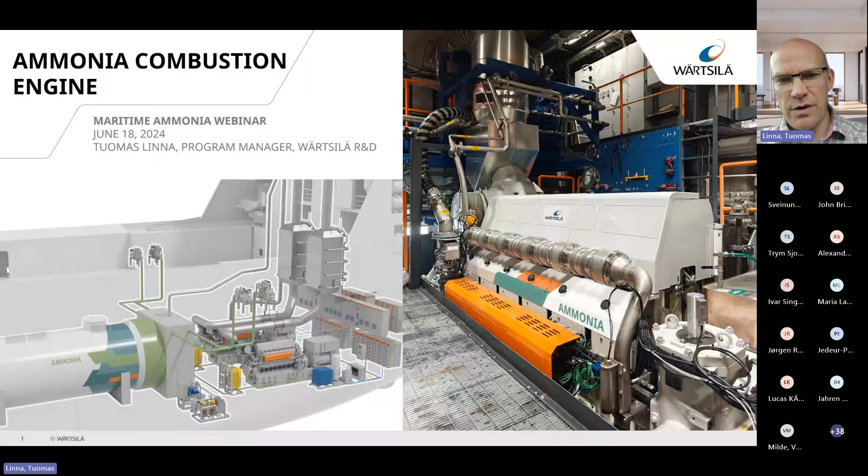On the right, you can see the picture of the ammonia test engine, which is similar to the first ones that will be delivered, and on the left side you can see the system that comes with it. So I just put this here.

So the safety is of course driving the development, but also the outcome of it. It needs to be safe to use, and that we secure in the internal collaboration and external collaboration. I'll get back to that one. But this is very, very important to do well, as we all know.

So this holistic approach that we are using - we have the whole ammonia system there, from the bunkering to the exhaust treatment. And then together with our partners, with customers and the classification societies, we then want to explore all possible problems that there may be, so that we can tackle those in the design. And if not, if there is still something, then during the operation, we want to ensure that nothing happens.

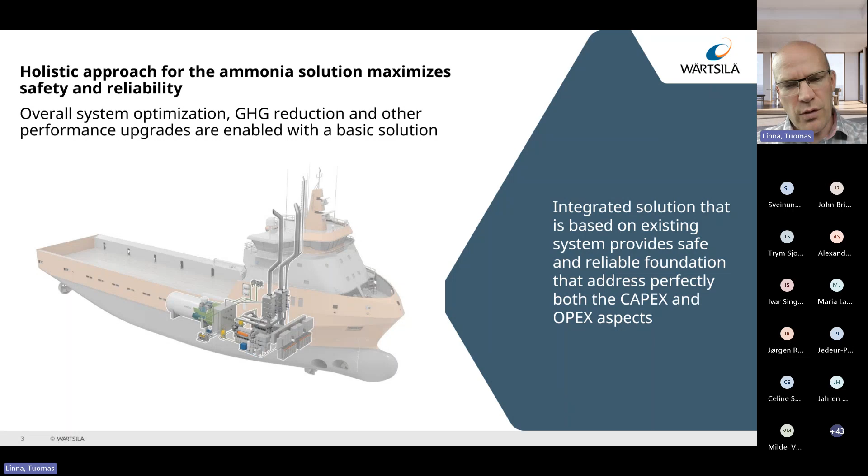So then we are able to - it's still compared to diesel solution or LNG, it's more expensive, but the capex is relatively okay, and the opex of course. So that is the approach that we have, addressing those both.

So here are some good things about why ammonia burns well and why the internal combustion engine is very good. We know that this is well proven technology, which can be translated relatively easily to burn ammonia and turn that to shaft power. So we have the existing safety concept, and with the 25 we are using the LNG type of combustion and the safety concept as well, which is a very, very good foundation to cope with the rules and to co-create with the rule creators. So this is a good starting point.

Then the second point - the internal combustion engine has tens of, probably thousands of millions of running hours altogether, but we know the basic technology relatively well, so the technology itself is pretty robust. The upgradability is something that is very, very good.

So we know that we can convert the existing fleet. Of course, then the business case dictates which type of engines you want to convert, because you need to do the R&D work there. But that is a good advantage there.

The fourth point, the multi-fuel engine - so you have a perfect backup, and this is of course in marine something that we all appreciate, that there is an instant backup right away. The same asset can do that with the backup fuel. The power density is good, so that fits for all kinds of vessels.

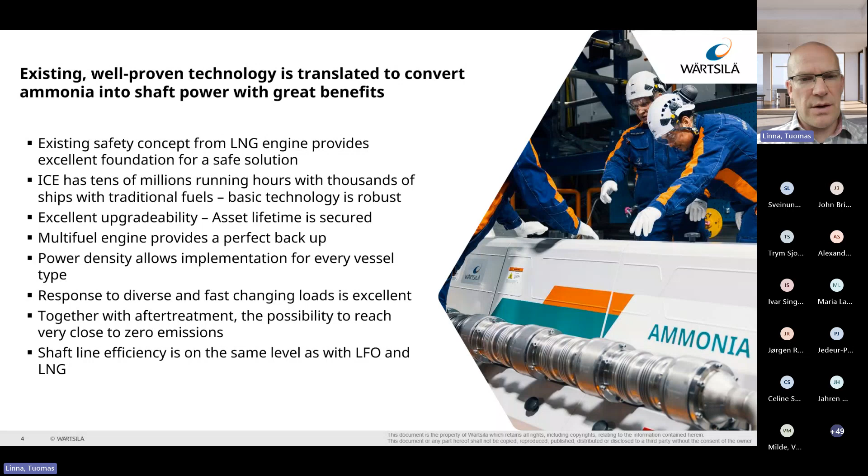I don't want to spend much time with this slide, but I just want to show that we are focusing with different platforms, running different types of engine concepts on the small scale and the bigger scale, to get a big enough picture. Because usually if you test only with one, you get only the features of that one. But when you have repetition and different kinds of things, like we have at Stord and at Vaasa in small and big scale, then you really learn. And I guarantee this is the right approach before you go to the field.

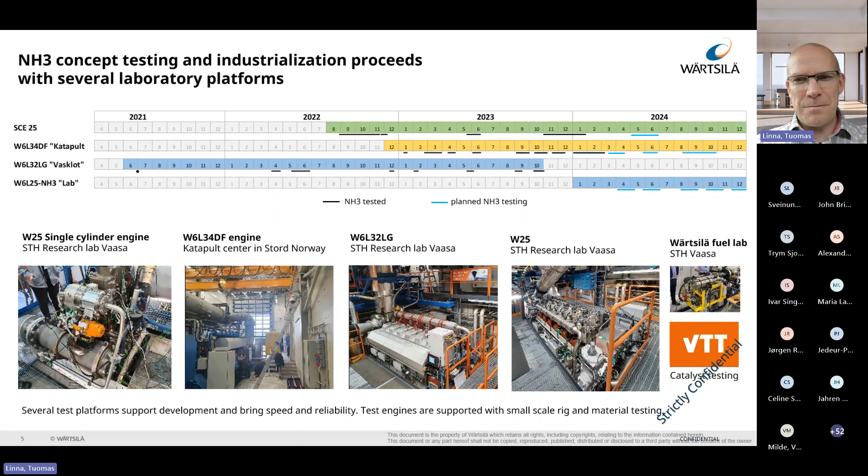About the technology itself, there are basically two ways we can divide this. We have either liquid ammonia or the gaseous format, so you can play with that. Ammonia is good in that respect, that you can decide which format you bring to the cylinder, and both can be divided into different smaller concepts. With those different test platforms, we have tested many different kinds of things.

And from there we have made the decision. We have not decided which one we don't ever use, but we have decided which one we go first, and that is the gaseous way, using the type that we use with the LNG engine. So always having the small micropilot there, which ignites and which can take over immediately as backup if needed. So if there is some problem in the ammonia feed or in some safety system, then the operation continues - it just turns that into diesel.

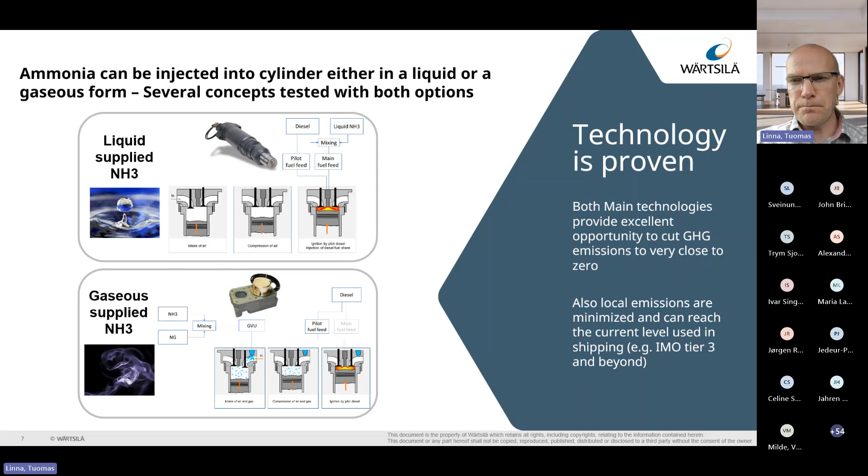Thinking about upgradability, we have done our mapping. We have a modular structure in our engines, and the newer the platform, the better that is. But we have tracked what are those things that we need to change when we do the engine conversion. On the left side, at the top, you have from diesel to LNG, and then from LNG to ammonia, after that one.

You can also do that directly from diesel to ammonia, that's no problem. That's actually what we did in the lab engine. Our 6-cylinder lab engine, which started the diesel validation of the 25 platform - when it had completed its work, we made an exercise. We took our service resources who did the conversion from diesel to ammonia in the lab.

But of course, what we need to say about the conversion on vessels - if you have an existing asset, then the engine plays a relatively small role. Of course, ammonia tanks take up big room, as we know, and safety needs to be taken into consideration at the vessel level. So I would say the engine itself, in the engine conversion, is a small thing. We are all the time talking about and thinking about the big picture. So if you have such a case, we are happy to be part of that design.

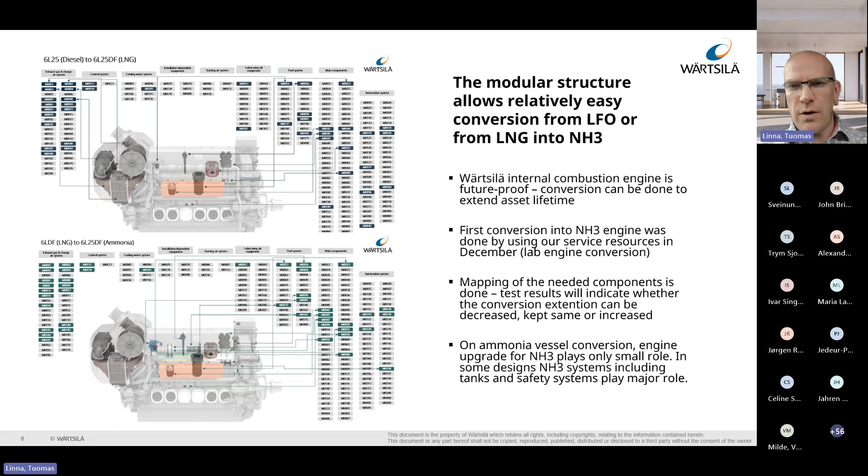Concerning performance, we brought the Wärtsilä 25 ammonia solution into the market last year in November, with the 70% greenhouse gas reduction promise. That doesn't mean that's where we end, but that's where we started this journey from. And when I talk about the greenhouse gas reductions, it's the greenhouse gas equivalency from tank to wake. So there's a little bit of laughing gas which is part of this equation. In practice, we are already doing better with that industrialized version, but this is what we can guarantee with that product.

With the lab, we already did the next steps a couple of years ago, and we are proceeding with those. So on one side, the big picture is to optimize the engine in a new way, and there are different parameters to optimize. Thinking about the greenhouse gas potential that N2O has, when you minimize that, the efficiency becomes the secondary thing. So it's really important to bring that close to zero. But there's the N2O, then of course the ammonia slip, NOx, and then the ammonia share and the efficiency that needs to be optimized.

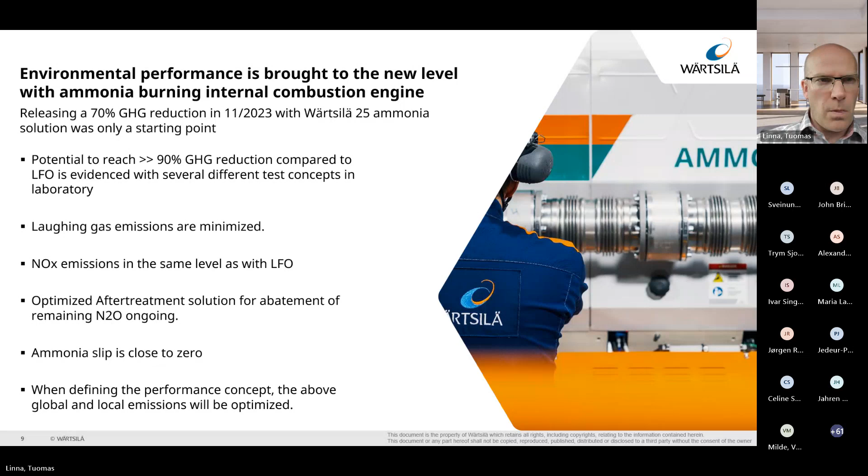And then get into this collaboration part that I also started this with, to ensure that we do it together safely. So we have several customer cases ongoing, which we are soon to close or contract. There we are talking about the 25 engine and this whole solution, from the bunkering to the exhaust gas mitigation.

Many of you may have the existing engines, 32s, 34s, or the large bore engines, 46, etc. Conversions are also possible for those. The industrialization decision needs to be done though. But what we are doing now with the 25, we can use the same things, so technically that is possible for the other engines as well. It is just more about what is the business there, and how big the market is. Then we make those decisions. But now with the 25 actions, we are proceeding and paving the path to the other engines as well.

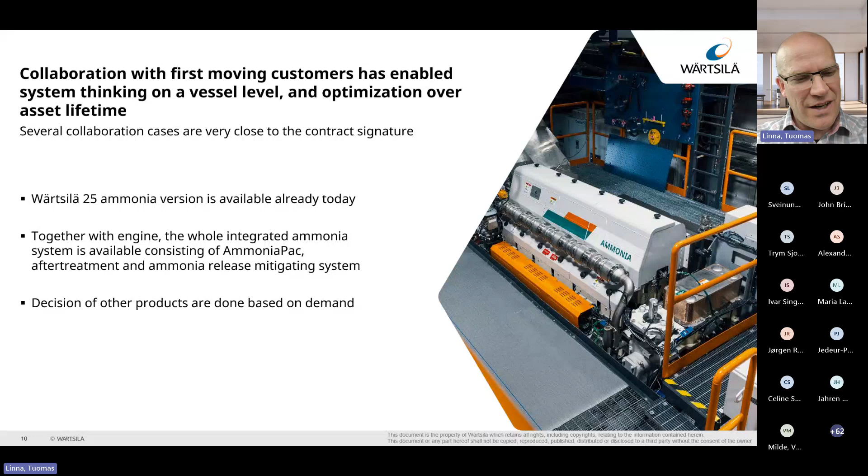I don't know how many minutes I used, but I tried to be very quick just to cover these main topics that I thought were important, and I was thinking that we take more time for the collaboration part if we have time. So yeah, the time is okay. If you do have some more, you can add it, but it is okay to stop as well if you're finished.

I think this is then a good time to start the discussion. So, any questions to me? Yeah, I'm happy to. Thank you for the presentation.

We received questions in the Q&A related to ammonia slip. The question is: is ammonia slip kept close to zero even at partial or low loads, such as in port operation or hotel loads? Yes, it is. It's not zero, but it's very close to zero, something which is acceptable to the classes. We are talking about only some tens of ppms. How we tune the engine is with all the loads where you are able to use the ammonia, which is now actually the whole range, from 25% to 100% load. There you are able to use the ammonia, and the whole system works with that.

Next question: you mentioned that gaseous ammonia injection may be better. This is different than what is used in two-stroke engines where it is always liquid injection, similar to LPG. What are the advantages of gaseous injection in four-stroke? Also, what is your current value of pilot fuel percentage? Very good questions. I don't mean to say that it's better, this low pressure approach. We selected that one because we think that from the safety point of view, it is the quickest and best way to enter the market. You can also do high pressure injection and we have good results with it. But thinking about the high pressure ammonia in the engine room and the leakage risk, we concluded that having the low pressure, less than 10 bar, in the gaseous format, is better from the safety point of view to start this journey. But both work well.

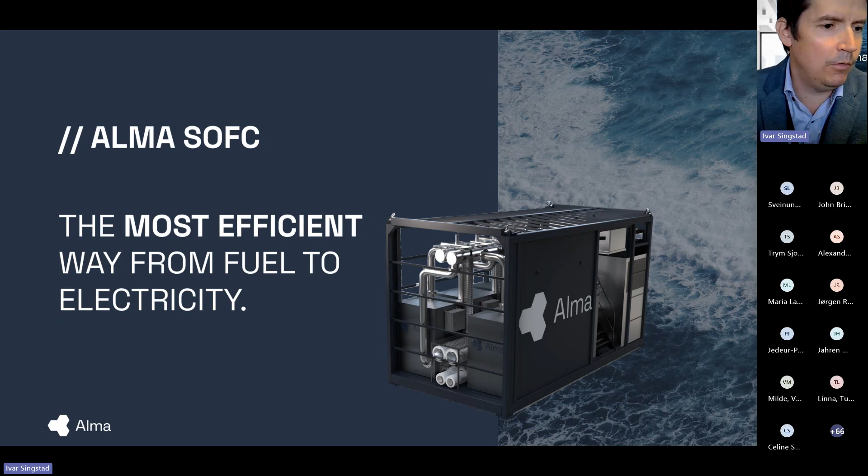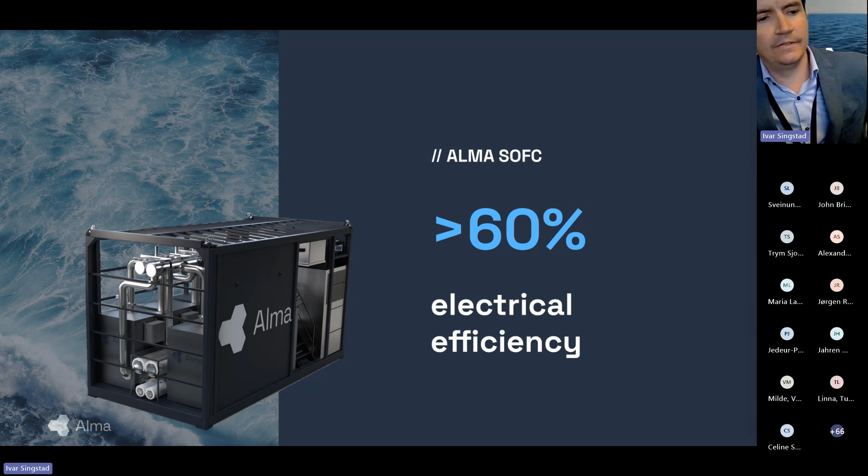So how efficient is it? Our ambition is to deliver 70% efficiency - that would include the carbon capture. 60% will, however, in many cases cut emissions by 50% and reduce fuel costs radically compared to alternatives. It also reduces the need for storage tanks, or adds range to your operations on board the ship.

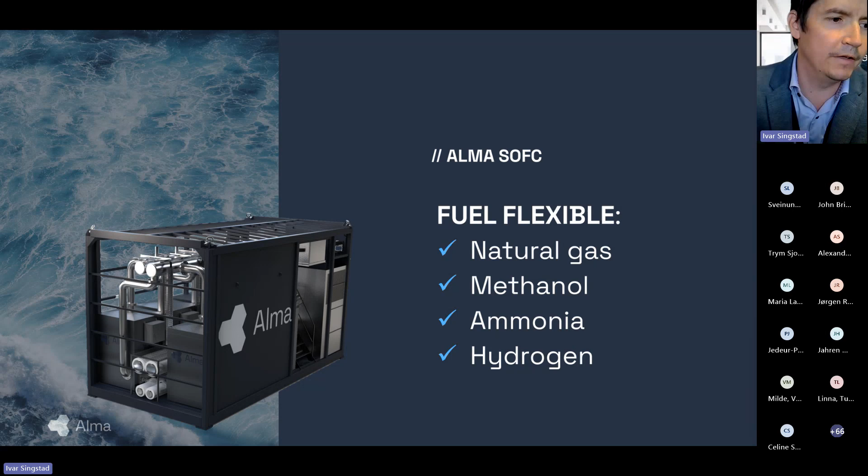So another benefit of solid oxide fuel cells is fuel flexibility. We have tested the SOFCs on the most relevant existing and future fuels with good results. So we see SOFCs as a bridge between LNG, the cleanest solution available today and an available fuel, and the new fuels like ammonia, the topic of today, but also methanol and hydrogen. In the rest of the presentation, I will cover most of what we are doing on ammonia - that has been most of the work till today.

So in addition to the efficiency and high fuel flexibility, our solution offers several other advantages. Like other fuel cells, it has no moving parts, so the SOFC is silent, low vibration, and has lower maintenance needs. It's a modular design, which means the installation can be distributed to optimize the payload.

So a ship like, for instance, a car carrier could arrange this in one deck and thereby have more space for more goods and more cars on board. SOFC is also ideal for carbon capture, since you never mix fuel and air.

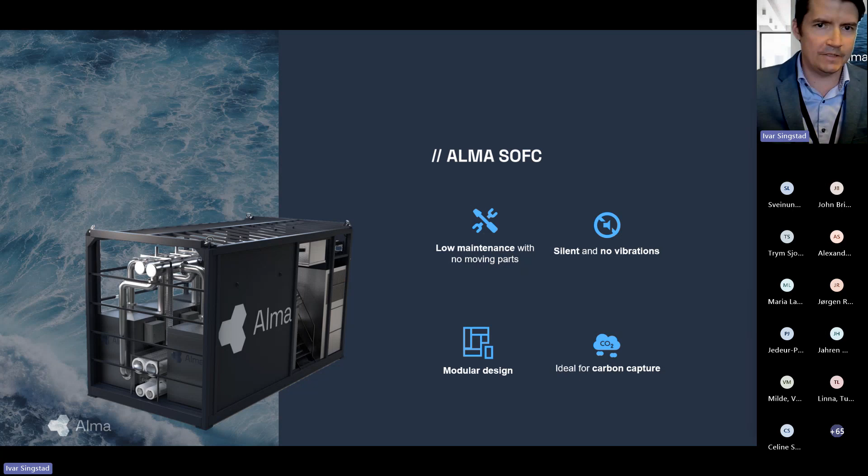You have a lower exhaust volume and then high CO2 concentration. So, of course, with all these benefits, it basically sounds too good to be true. And of course, there are some drawbacks with this technology. It's still immature, and with that comes cost that is today a bit higher than engines. But that being said, in the lifetime of a power system, the fuel is by far the biggest cost.

And especially with future fuels like ammonia or e-methanol, the fuel cost will be quite high for the coming years. So efficiency kicks in as really important. You can see in the illustration here that even though the SOFC is twice as expensive as an engine, it's profitable within 2 years for the ship owner.

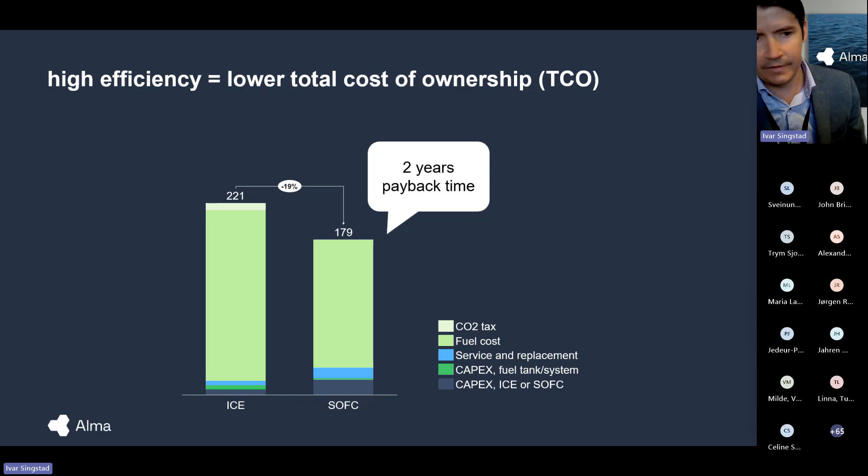So that was a bit about the benefits, about the technology. And now I'm going to tell you how we are planning to scale this from the lab where we are today, and on board the ships.

So the first thing we did was last year, we tested one stack module in our labs here in Bergen. That is a 6 kilowatt stack module. Importantly, we ran that on pure ammonia. The important part there is that we could show efficiency from 61 to 69%, depending on the range. So a really important test to show that it's possible to run ammonia in SOFCs.

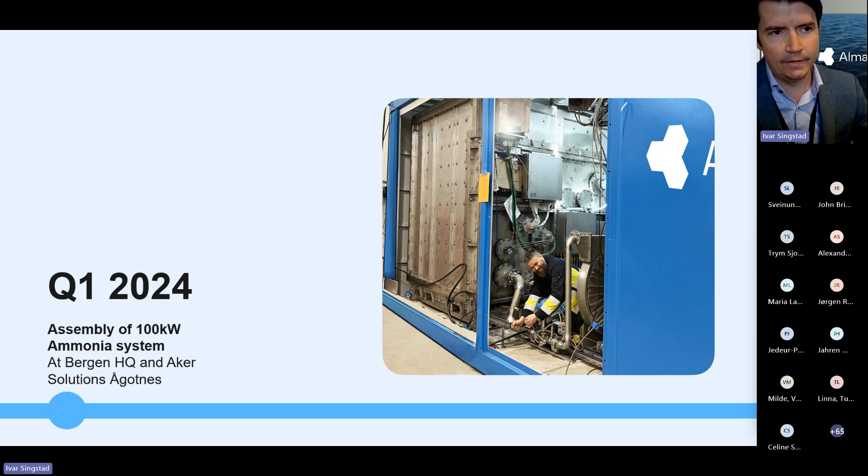Last year we have been building a 100 kilowatt system, what you see in the picture here, that has been built in our office here in Bergen and at Aker Solutions Ågotnes. And here you can see what's inside the hot box, where you have one module.

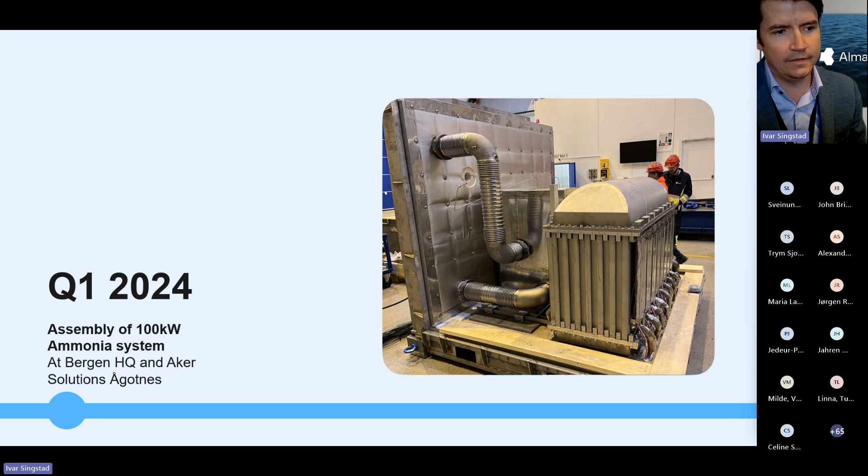This system is still quite a large test setup, but you can see that the stack module itself is not that large. All of this is being tested at the energy house at Stord. So we had a test readiness review of the 100 kilowatt ammonia module on Stord yesterday, and we hope to be starting it this week.

Our test setup is in this garage, and then Wärtsilä has their engine in this one, and over here you have Amogy's testing. So all the speakers today are doing testing in this building.

Next year we will launch our products, and with that the specification—size, weight, output, input—all the things that ship owners are quite curious about, before we have the first project where we go on board the ship.

This is on a cruise ship, so as you probably understand, ammonia is not the first application—cruise ships are not the first application for ammonia. So we will do this demonstration on board an MSC cruise ship that will be on LNG, a 500 kilowatt installation that will be in the machine room, as part of the whole system there.

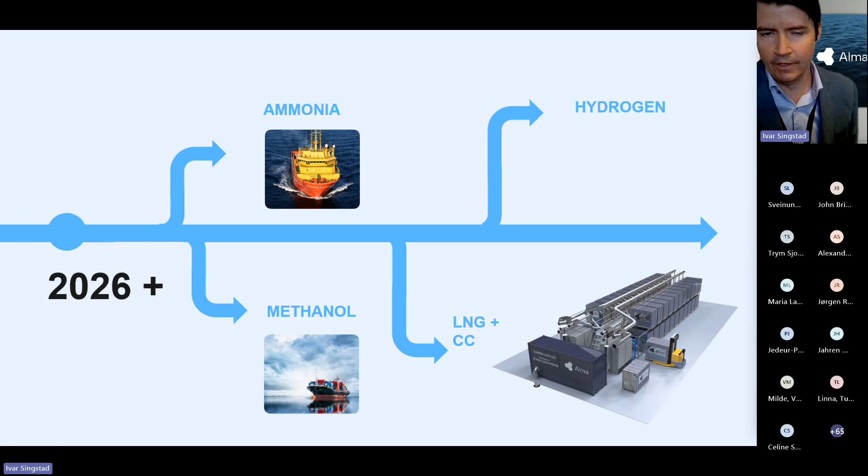And from 2026 and out, we plan to deliver on several things, both on ammonia, methanol, but also LNG with carbon capture systems.

Our plan for industrialization is that today we build things at Aker Solutions. We plan on putting up a pilot assembly line as soon as possible, before we aim at full scale production in '27 at 400 megawatts yearly capacity, and after that, global expansion.

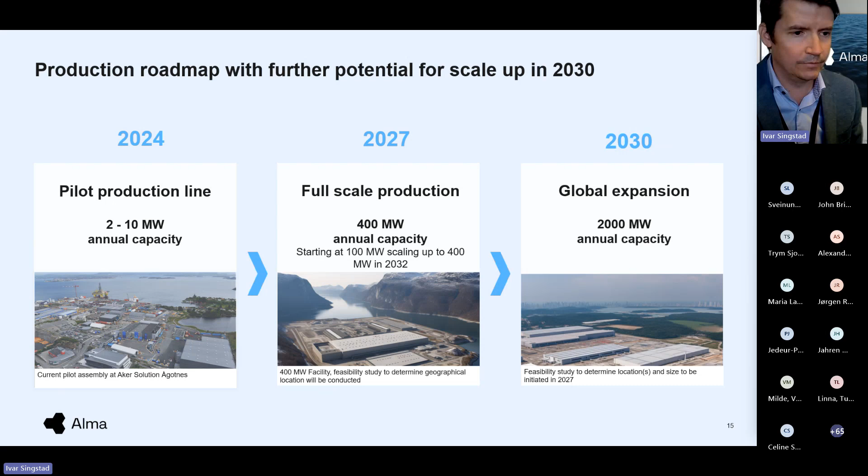So the topic today is ammonia, so I would like to highlight the benefits of SOFC for ammonia applications. Of course, the efficiency we have already talked about. What's unique with SOFC is that when you run it at 800 degrees, you can crack the ammonia internally in the stacks. So there's no need for pre-reforming or anything. This is very interesting, and what we are aiming to demonstrate now at Stord in the coming weeks.

There's no need for pilot fuels either—it's pure ammonia going into the system. And there's negligible NOx.

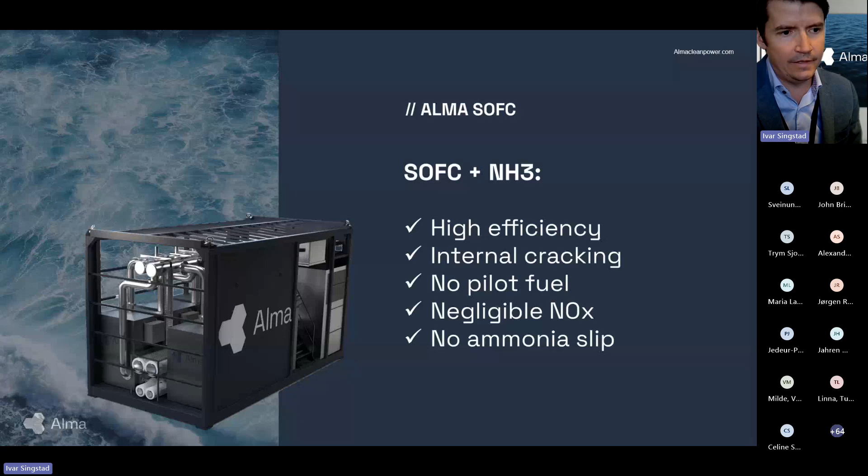The numbers here we don't have before testing it. When we test in the lab, it's not possible to measure anything because the amounts are so small. But we have reason to believe it will be low, because the rest of the fuel that is not converted in a fuel cell is burnt in the afterburner below the formation temperature of NOx. So of course it's lower risk of ammonia slip with these fuel cells than with other technologies.

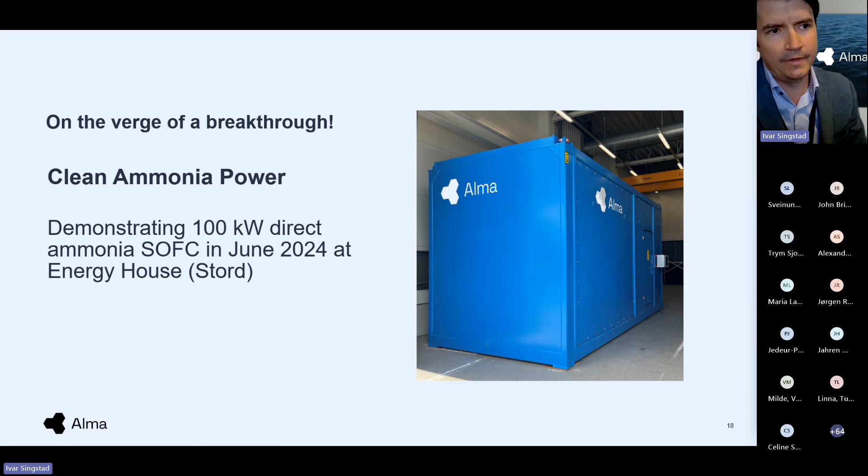As mentioned, we hope that we are on the verge of a breakthrough with this system that you see here. You see the cap module at Stord, ready to push the button in the next few days.

Here you can see the setup, the container. You can also see the partners in this project: Wärtsilä, Equinor, Yara, Eidesvik, and supported by Innovation Norway, Siva, and Sustainable Energy. You see the hot box module to the left with the stack modules inside, and you have the BOP system to the right.

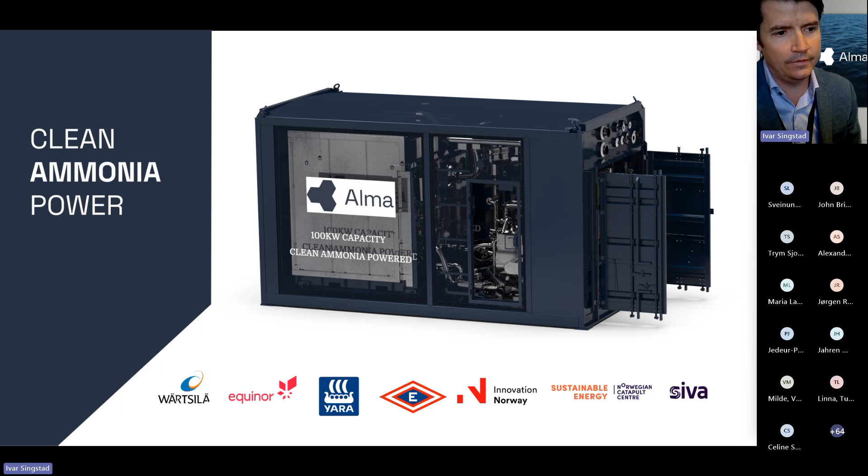So what we're going to do on ammonia after we have done these tests: the next ammonia project is called ShipFC, where we are going to retrofit 2 megawatts of SOFCs on board Viking Energy, a vessel owned and operated by Eidesvik for Equinor. That is going to be done in '26. The partners in this project are Equinor, Eidesvik, Wärtsilä Power Solutions, and Wärtsilä Gas Solutions.

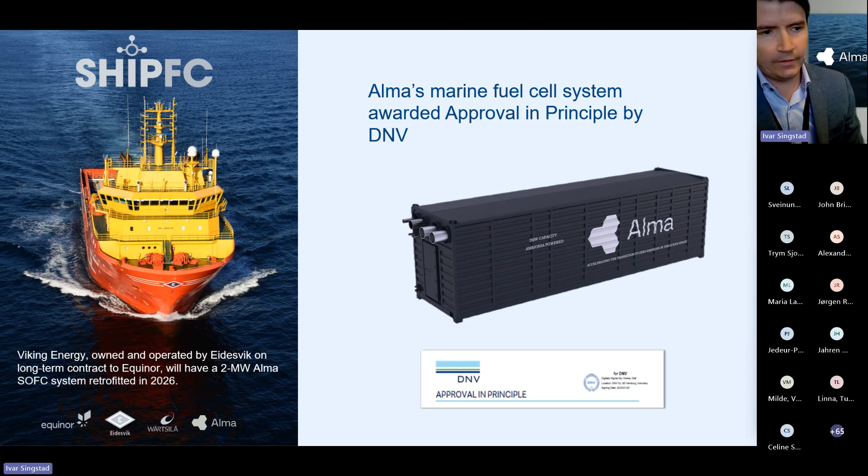Yeah. So that was what I had presented. I probably talked too fast as usual, but if you have any questions, I'm here. Thank you, no problem.

We have a lot of questions in the chat, so I think we're just gonna jump into it. Can you say more about maintenance and replacement of SOFCs versus combustion engines? And is the maintenance cost for SOFCs significantly lower due to the lack of moving parts?

Take the last part first — that is what we guess. Of course there's a lot of things you have to replace in engines; I'm not an expert on this, but we have several people from engine manufacturers on our team who have been working with Bergen engines and others. With SOFCs, what you have to replace are the stacks, and the stacks degrade over time. Right now our philosophy is that we change everything within 5 years. So when you have the maintenance interval where you dock the ship, we replace everything. But the systems are built as modules, so you can use a simple forklift and just replace one module if needed. We designed this to last 5 years, and then we replace it at docking.

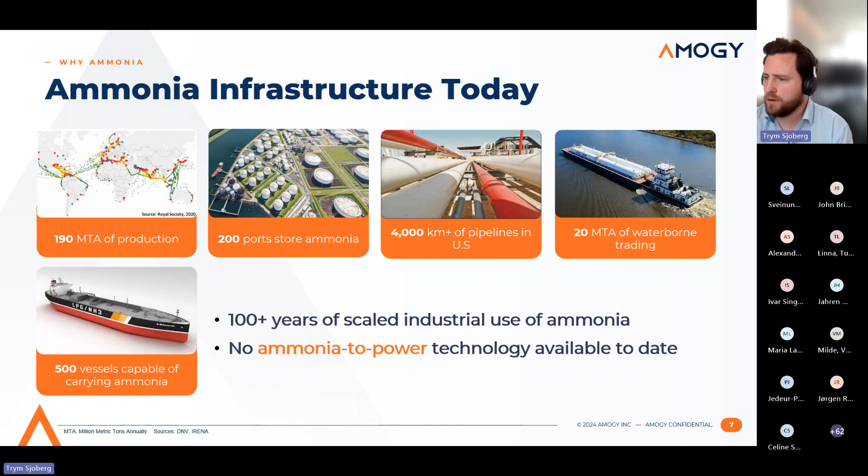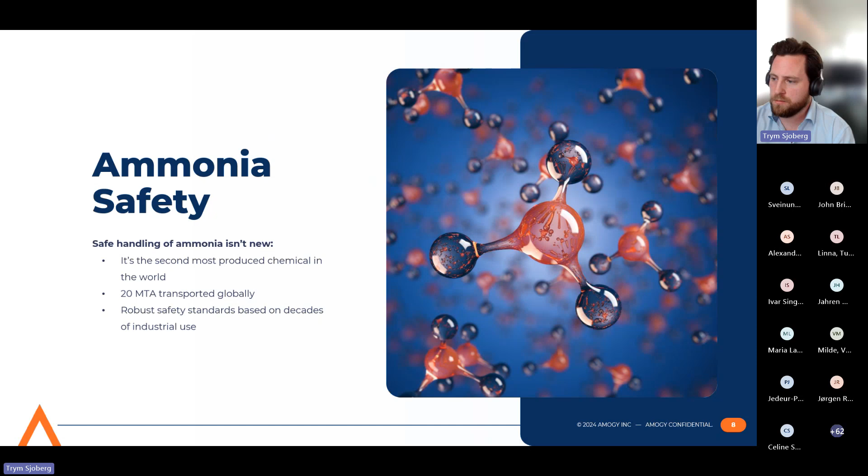So why is ammonia such an interesting future fuel? Well, one of the main things is that ammonia infrastructure today is quite advanced because it's the second most produced chemical in the world, with over 200 ports and 4,000 kilometers of pipelines in the US for moving ammonia. This is something we feel is very important, something that can be built upon. And since it's been used for over 100 years, the safety aspects of ammonia are quite robust on land, so that's something we feel is important that we can build off of.

The interest in ammonia has also been growing quite a lot, with over 15 ammonia bunkering projects announced, among other things Yara in Norway. Shipyards have also accumulated lots of orders for very large ammonia carriers in recent years, so the fleet is growing.

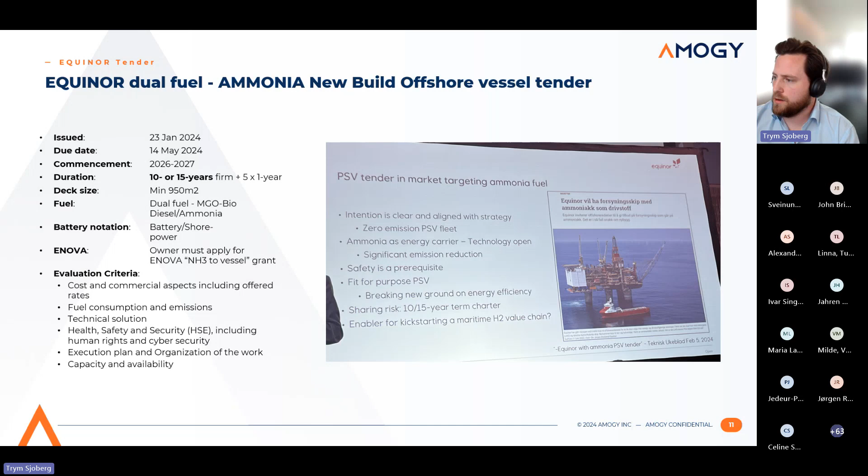Also on a governmental level, Norway, through the ENOVA program, has its own ammonia fueled vessel program, offering up to 80% soft funding for additional capex costs when using an ammonia solution compared to a traditional solution, for both new builds and retrofits. Big companies such as Equinor have also had an offshore vessel tender for a vessel with dual fuel ammonia. So the interest is there, that's what I'm trying to put out. It's an exciting time for ammonia.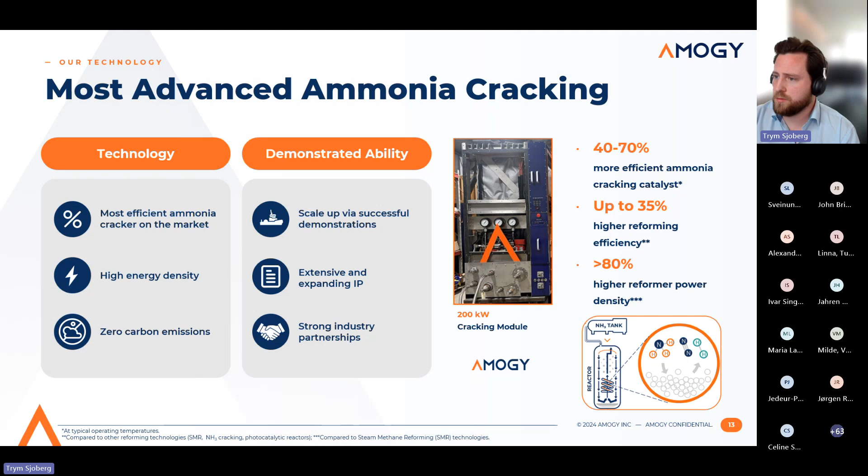But now to our technology, which I guess is the most interesting part. We do ammonia cracking, and we're one of the most efficient ammonia crackers on the market. We have a high energy density, and we do the cracking at relatively low temperatures, with zero carbon emissions, which is what our technology gives.

Here's a simplified overview of our technology. We start with ammonia storage, then feed gaseous ammonia into our reactors, where it reacts with our catalysts and heat, and we get the products nitrogen and hydrogen. Since there's some ammonia left in the reformate, we also put it through our adsorber, which removes the ammonia, and then the remaining product is delivered to the hydrogen PEM fuel cell, and you get electricity. So you kind of get the advantages of storing ammonia and the advantages of using hydrogen.

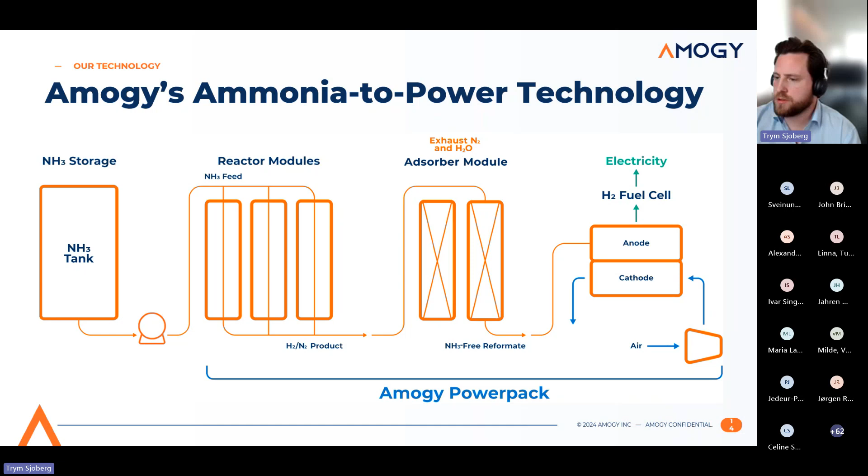We have demonstrated our technology quite a lot, not just theoretically, but also out in the field. It started with the ammonia-powered drone in 2021, a 5 kilowatt system with a small miniature version of our system now, and it was able to fly approximately 3 hours, with a weight of 22 kilos, which was quite interesting.

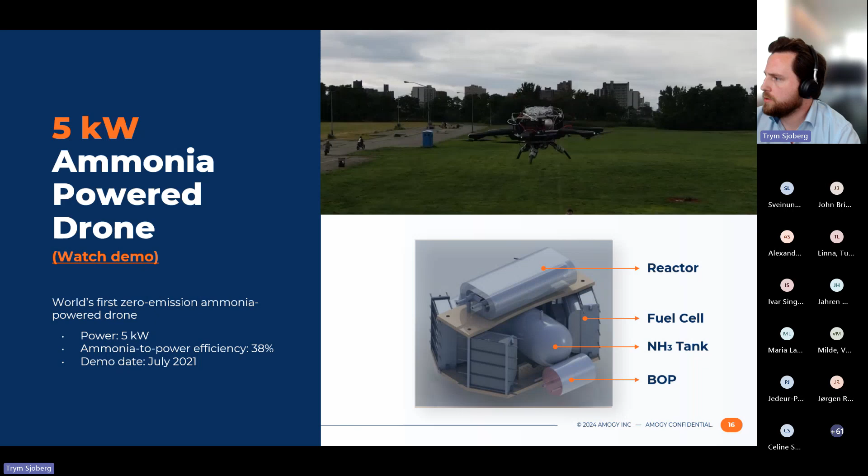Here you can see a small video. From there we went quickly on to our ammonia-powered tractor. It was a 100 kilowatt system, a John Deere tractor. We took out the original propulsion system and everything, and put in our system. The farmer said it was a very interesting system because he was dreaming about using the ammonia from his farm to power his tractor.

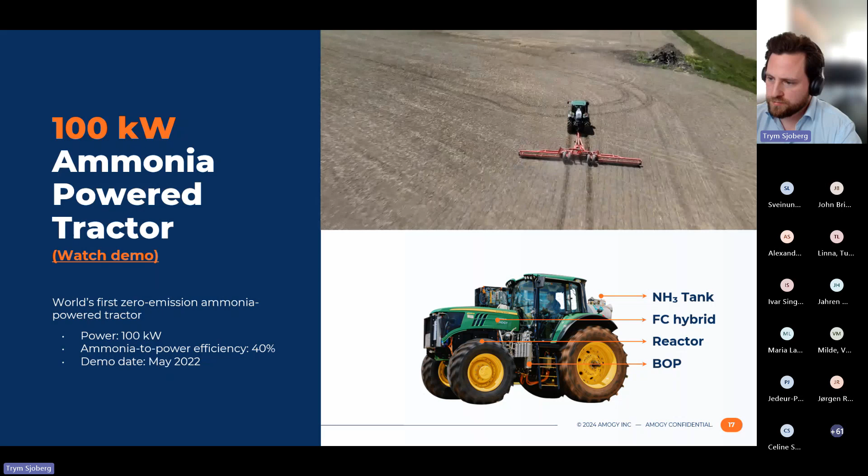And from there, in under a year, we also had our ammonia-powered semi-truck, a 300 kilowatt system, which didn't drive on roads, but went around a track at highway speeds for quite a while. Compared to the other ones, this was the first time we fit the technology in a good form factor to show that we could also do that.

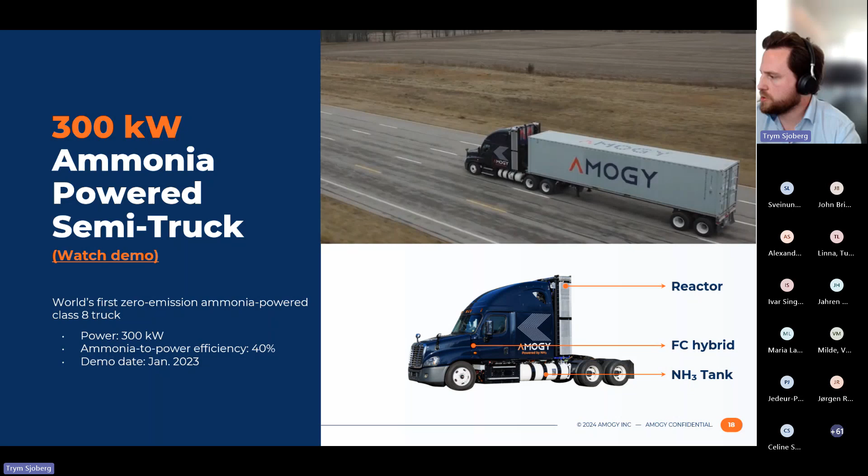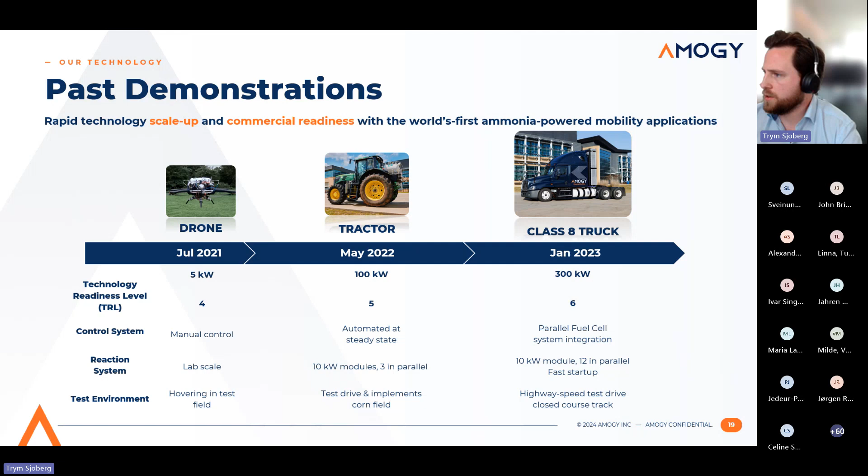So there's been a rapid scale up in our technology towards commercial readiness, and the most interesting demonstration is upcoming, and that's our tugboat, which is planned for late summer, which will be the world's first carbon-free ammonia-powered tugboat vessel.

We have quite a lot of partners and have had a large focus on safety, even though it's not a commercial vessel. We've had talks with DNV, US Coast Guard, and Lloyd's Register, and being supplied green ammonia from Yara. The naval architects are C-Job, and electrical systems and integration is with Seam.

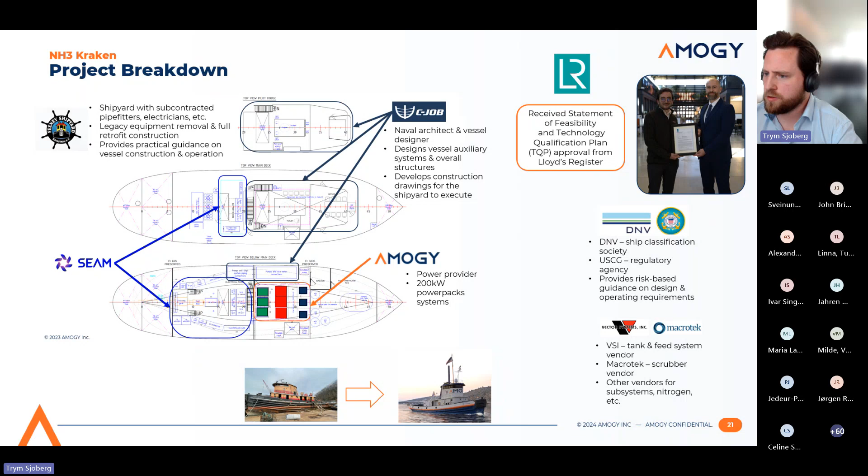It's been quite a large undertaking getting all this to work. It's been a bit harder and took a bit longer than we expected, but it's been a very important learning for us, and we kind of see it as a good thing that we know the issues our customers will eventually face as well, so we can handle those when they come. It's an interesting and important learning for our company.

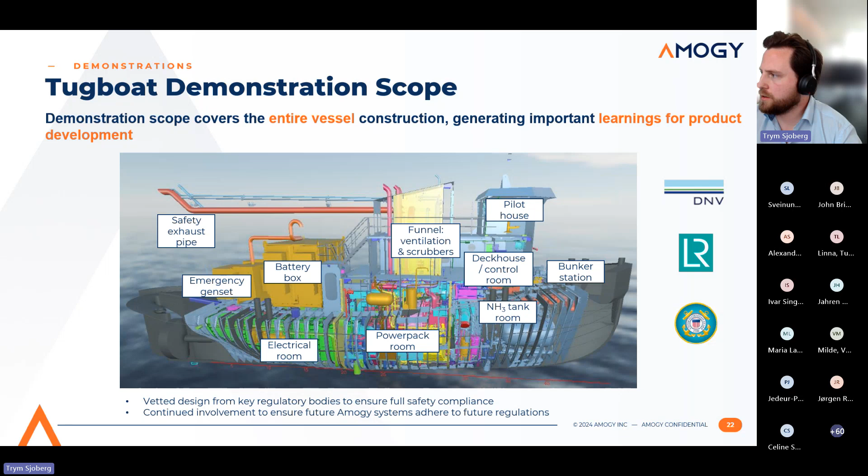So, as well as these demonstrations, which are important milestones towards commercialization, we're also testing our power pack at the energy house that Alma talked about at Stord. We looked around the world, and that seemed like pretty much the best place to do it. So we're testing our 200 kilowatt pack there now.

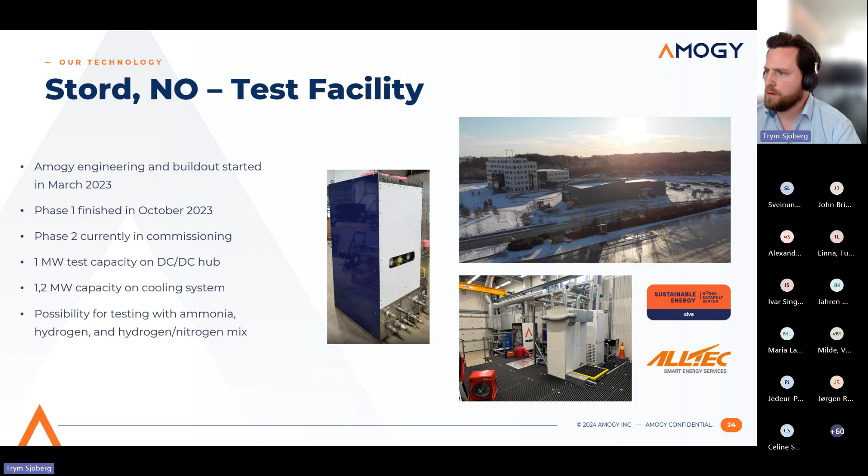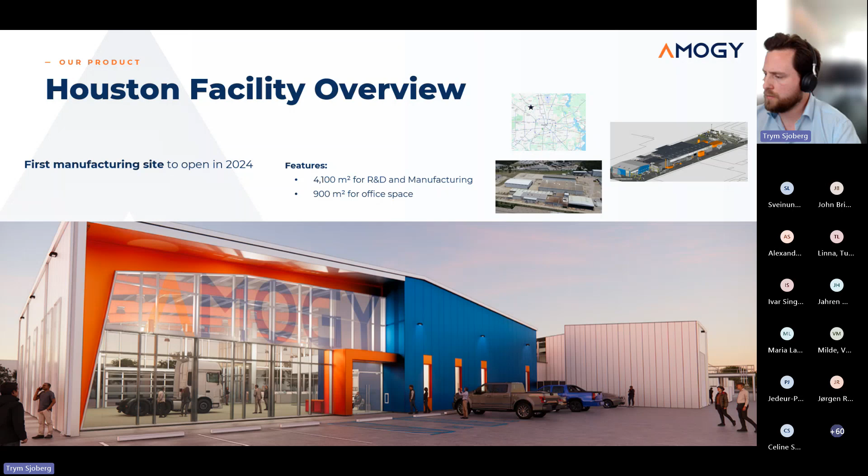And also, we're building our facilities in Houston. That will be planned to open in 2024, and that will be a testing and manufacturing facility.

So our product as of now is mainly our Amogy Power Pack, our 200 kilowatt solution, which is made of a reactor, our adsorber, and a fuel cell. We don't make the fuel cell, but right now we're mostly partnering with Ballard and PowerCell. But in theory, we could use other fuel cells as well.

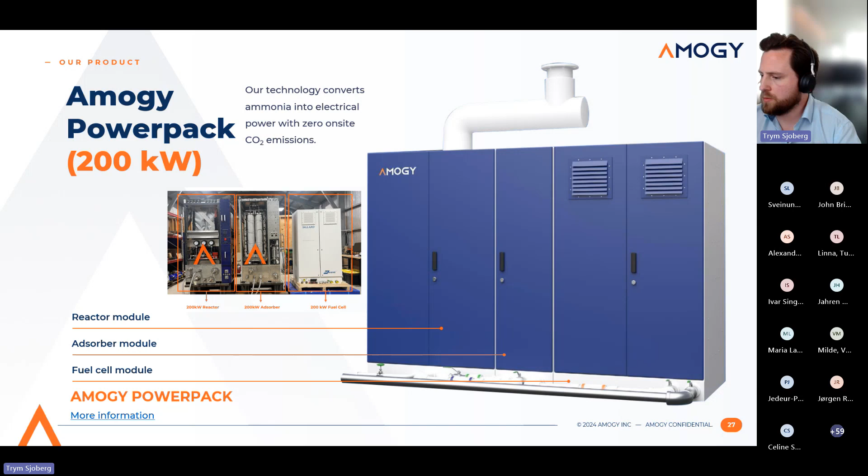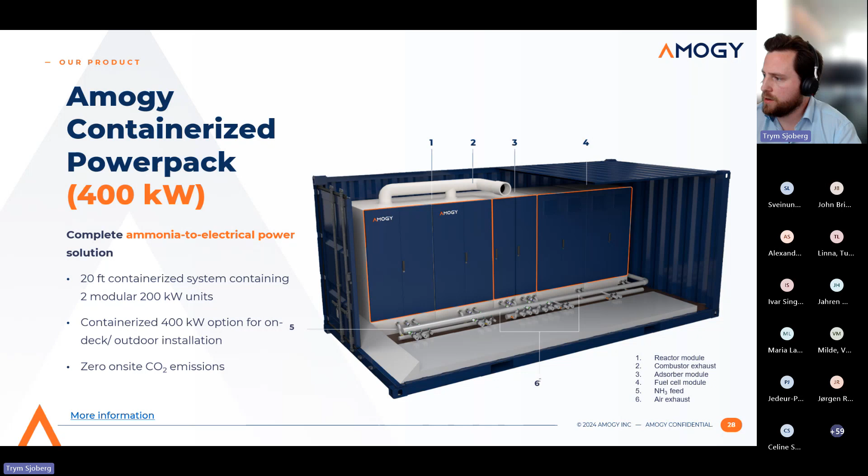So here's a mock-up of how it can be put together, or these systems could also be placed in different places, but this is a more tidy presentation. And then also we have our containerized pack, 400 kilowatt solution. So it's two of the other systems you saw crammed into a 20-foot container, which is great for rebuilds, but also could be useful for new builds which need versatility to their systems.

And we have some interesting pilot projects that we're working on now. At Maritime, we have our Hanwha project, where you can see we have 3 of our containerized solutions on the back of the vessel, which is very interesting, working with one of the largest shipbuilders in the world. And also, just to show our versatility, we also have the project with Terox for power generation on construction sites, because there's a large need for green energy with all the upcoming regulations for what you're allowed to emit in construction sites. So with all the new battery-powered construction vehicles, they need a solution, and that's what we're trying to create.

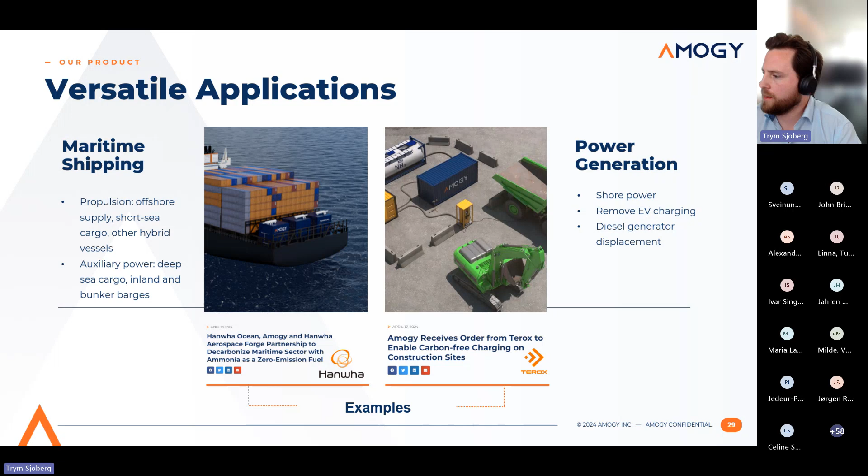So our main technology is the cracking. In theory, we could work with many different things. Right now, it's PEM fuel cells, because that's the most mature technology here. But in theory, we could also in the future work with Alma and their solid oxide fuel cells, or maybe hydrogen engines, which some people are working on, and turbines. So our power pack is what it is now, but in the future, we'll see what the future holds.

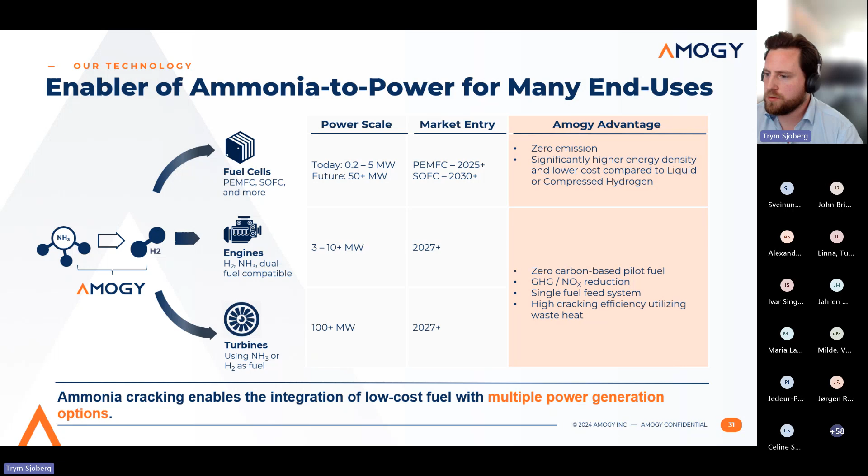So there's also options for versatile configurations of our technology. For example, you could have only our system together with batteries, or in combination with something like Wärtsilä's ammonia engine to increase your efficiency. Depending on your operation profile and load profile of the vessel, you could optimize this.

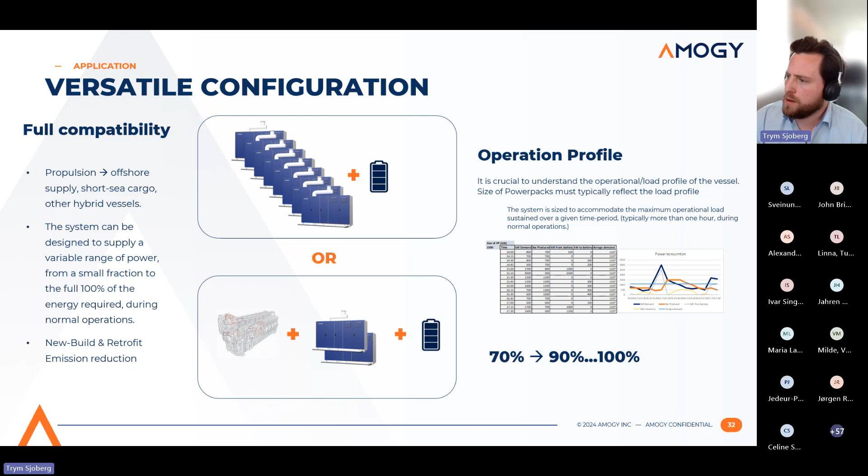So yeah, it's important to remember that our system can be added in new builds or retrofits to reduce emissions in various different ways. So yeah, that's a short presentation. I guess that's our roadmap on our way to broad adoption in the future. And yeah, that's it. Thank you.

Yeah, thank you Trym. We'll just hop into the questions in the chat. The first one is: what is the ammonia cracking capability that can be achieved in kilograms of hydrogen per hour for your largest cracker units?

Sorry, I'm not exactly sure of the exact numbers there, but if you send me an email, I could probably get that answered. I'll try as best as I can to answer the questions, but like I mentioned, I've been here since May, so I'm not the most in-depth knowledgeable, but I'll try as good as I can. Or if not, I'll get a hold of someone that can at our company, of course.

I also have some questions regarding what fuel cell technology you use, but I think you answered it at the end of the presentation. You currently have PEM, but you are open for others as well, right? Yes, correct.